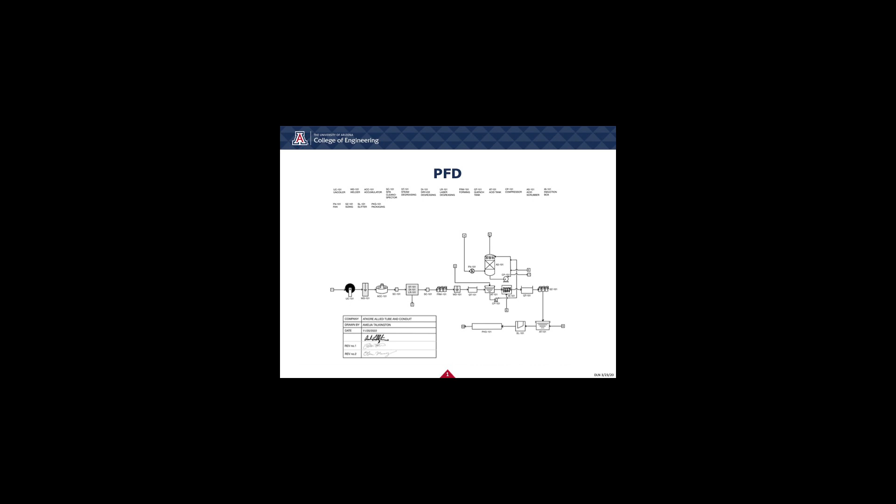Then the steel passes through the forming section of the line where it is rolled into tubing and then another welder to secure its shape. The steel then passes through a quench tank, an acid tank, an induction box, and another quench tank before finally being sized, run through another acid tank, and then run through a slitter and packaged.

On this slide, we have tabulated the different steel strip widths and their accompanying line speed specifications. It is important to our design project that the alternative strip cleaning method is able to meet all of these specifications as they are all used for production. When reaching out to companies for more information about the performance potential of some of the alternative methods, we often use 350 feet per minute and 7.85 inches for the steel strip width as the starting off point to gauge compatibility of the new method with Atkore specs, because it would have been the most challenging line speed and strip width combination to meet.

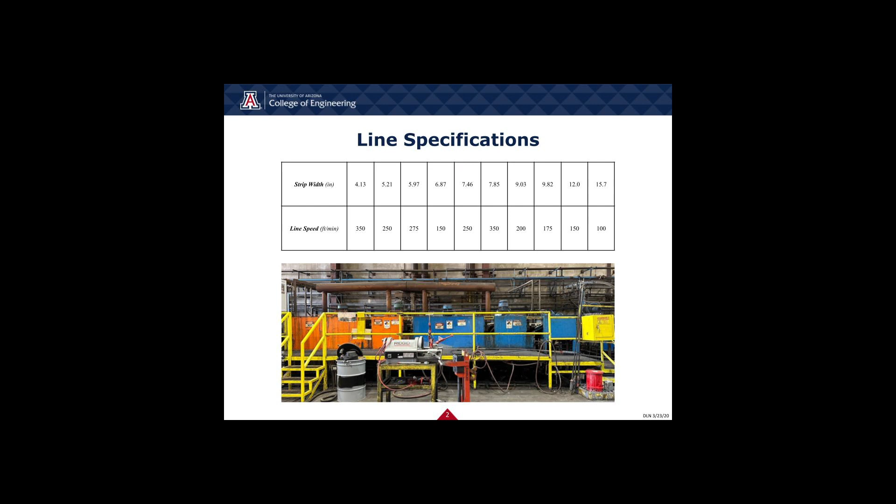As Olivia discussed, many different strip cleaning methods were considered. However, 4 methods clearly stood out when adhering to our objective statement: steam, dry ice blasting, laser, and induction. Thorough investigations were conducted into each method, and trade studies were performed to determine which method best fulfilled the requirements of our process.

For steam cleaning, a steam generating system consisting of a steam generator, nozzle box, condenser, and condensate pump would need to be installed. The nozzle box would consist of 32 jet nozzles, enough to remove surface contaminants from both sides of the steel strip. The force and high temperatures of steam is capable of removing dirt, oil, and rust. Contaminants are heated, lifted, and transported off the steel substrate. Water and steam from the nozzle box can be recovered via condenser and filters and recycled back into the steam generator.

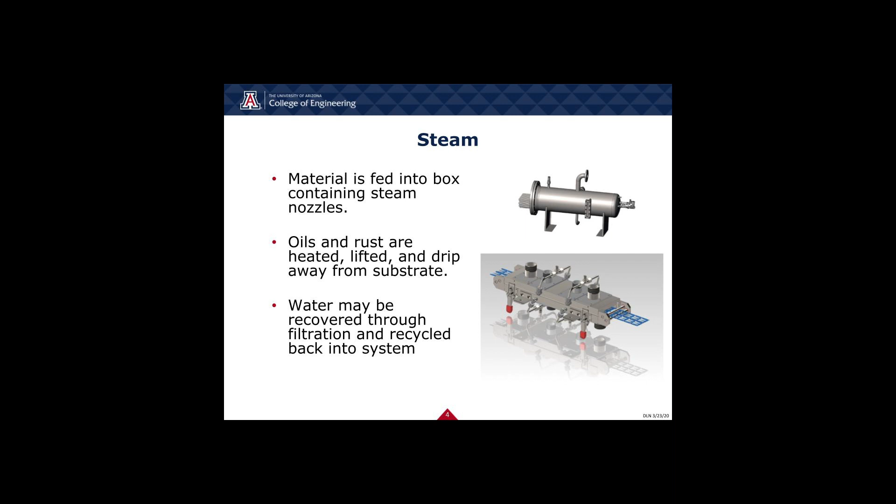Dry ice blasting consists of using high-pressure air to blast the steel with dry ice pellets. As the pellets strike the steel, they sublimate, pulling surface contaminants off the steel strip. The dry ice pellets would need to be produced and stored on-site using industrial coolers and dry ice forming machines. The carbon dioxide produced during this process could then be used to calibrate acid scrubbers further down the line.

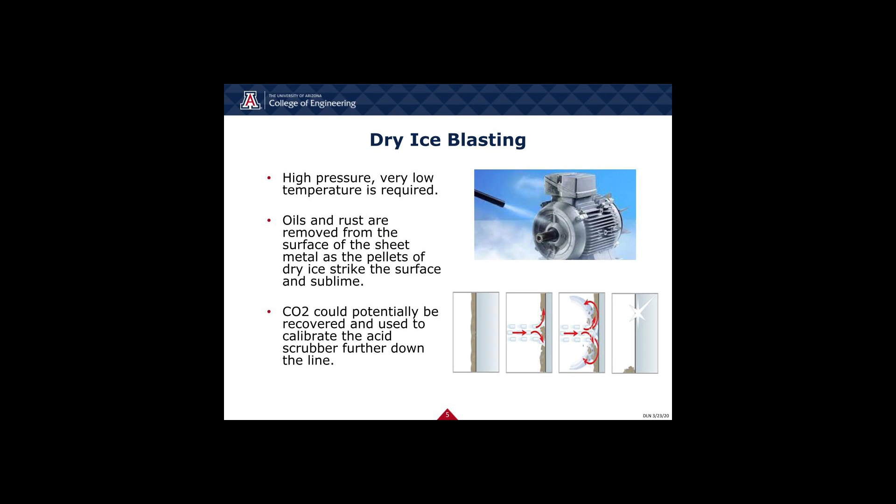Laser strip cleaning involves feeding the material in an enclosure containing 4 laser heads, covering both sides of the steel strip. The focus beam of the laser is capable of vaporizing a thin surface layer from the steel substrate. No water or solvents are required for this process. However, adequate ventilation is required to prevent contamination of the laser lenses.

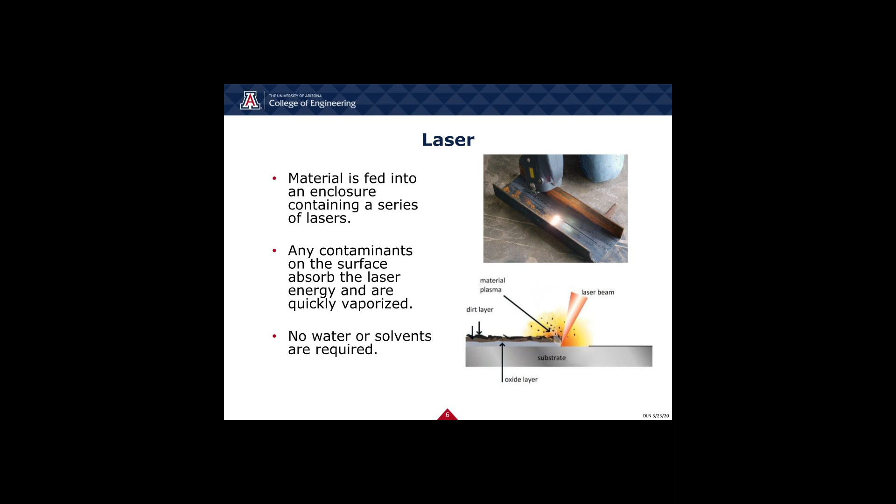In induction heating, surface contaminants are burned off the steel through the use of induction coils. Current is sent through the coil, generating electromagnetic fields that heat the steel strip. No auxiliary systems are required for this process, and precise power settings can be used to dial in the exact amount of energy needed for application, thus optimizing energy use.

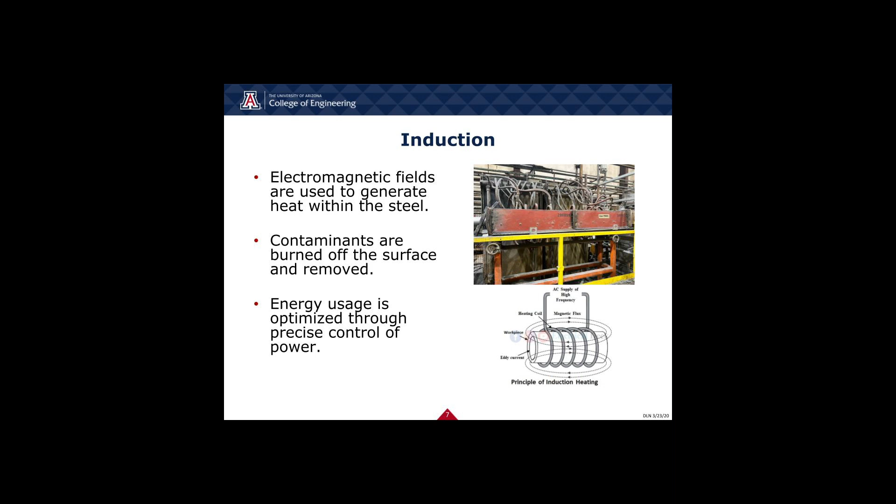After researching each method, a comprehensive decision matrix was constructed for method implementation. Here we see an abbreviated compatibility table showing some of the important requirements for our process. Capability to meet line speeds, capability to meet space requirements, installation and accompanied costs, and cost and ease of routine maintenance are some of the criteria of our decision matrix. Each method was assessed, and we found that induction heating best matched all the criteria presented.

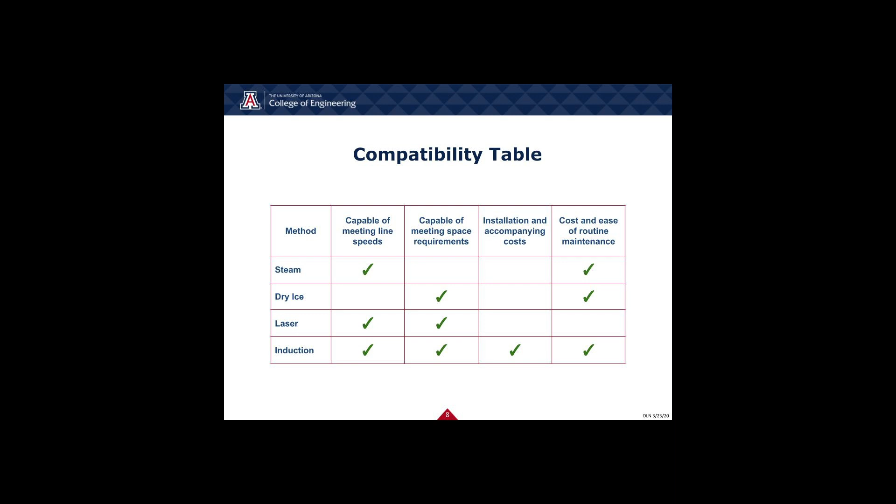Once it was decided which method would be best for implementation, it was time to begin testing its effectiveness on the line. However, before we could begin testing a new method, it was necessary to acquire a device that was able to read the cleanliness of the steel strip as well as determine the baseline cleanliness of the system. After researching many different surface testing devices, our team came across the SITA Cleanospector. It is a device that is able to perform the exact measurements we're looking for.

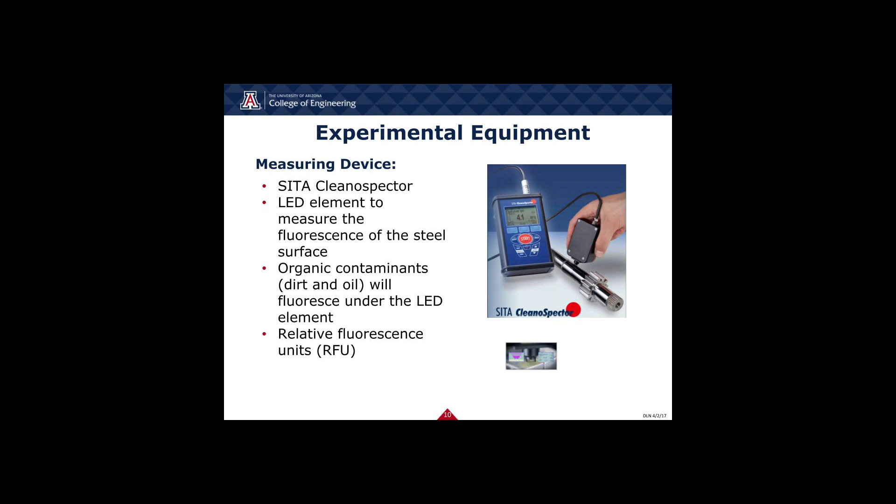The SITA has an LED element to measure the fluorescence of the steel surface. This fluorescence is able to measure the amount of organic contaminants, which is dirt and oil in the case of our steel strip, in relative fluorescence units, also known as RFUs.

Once we had the SITA measurement device, it was time to determine the baseline of the current caustic strip cleaning section. First, since our experiment involved two SITA Cleanospector devices, we had to perform t-test calculations to ensure that both devices had a very strong correlation in the values that they read. A total of 20 measurements were taken with each Cleanospector device, and a t-test analysis was performed.

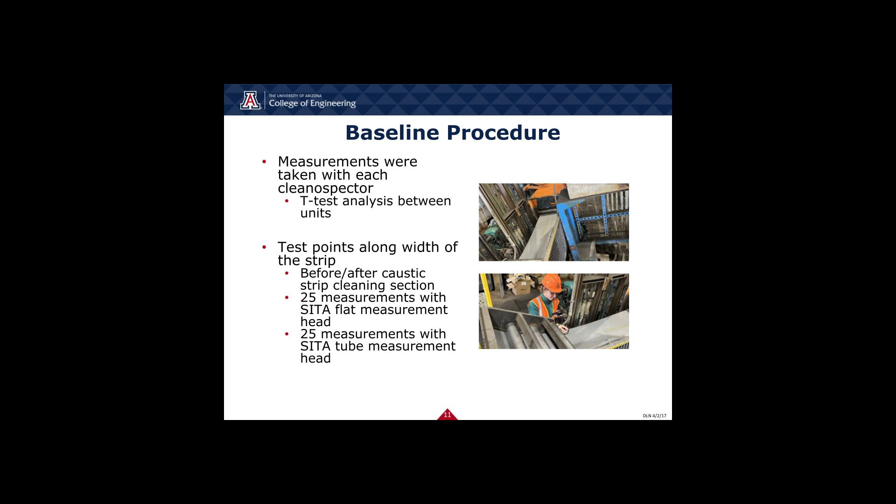Once it was confirmed that both devices could be used, 25 test points along the width of the strip were measured before the caustic section and after the caustic section. One round of test points used the SITA flat strip measurement head as the steel was still in strip form at this point in the process. The other round of test points used the SITA tube measurement head as the steel strip would be in tube form for the induction readings.

Once the baseline data was obtained, it was finally time to obtain the induction data. The caustic system was shut down, and 3 different induction power levels were used to determine the size of the induction box necessary to achieve the cleanliness determined from the baseline testing. The initial power level was the one at which the line was already running, which was 53% of a 1500 kilowatt induction box unit. The line was then stopped and 25 measurements before and after the induction box were taken.

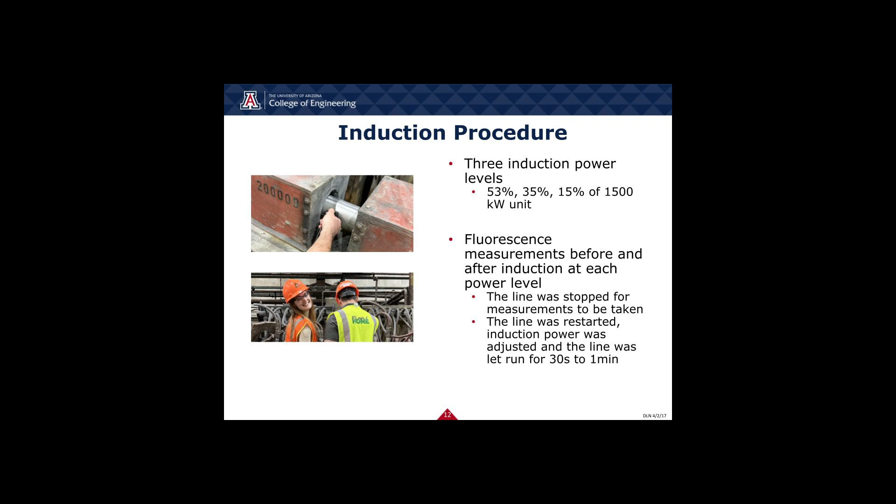Then the power level was decreased to 35% and the line was allowed to run for 30 seconds to a minute after the induction system reached steady state. Then the line was stopped again and 25 measurements were taken again. Finally, the power level was decreased to 15% and the same measurement process was repeated. After all of the data was obtained, the line was allowed to resume regular production operation.

The results of our experiment showed that the induction box, when run with a maximum power of about half of its full capacity, still removed a higher percentage of waste than the caustic tank. Most interestingly to our project was that the induction box, being set to only 15% of its maximum power, was still able to remove more waste than the current caustic tank system. The lowest power output saw almost 89% removal as opposed to 76% removal by caustic.

Now that we have obtained and analyzed our experimental results, we feel confident in the abilities of induction cleaning as a viable alternative to caustic strip cleaning.